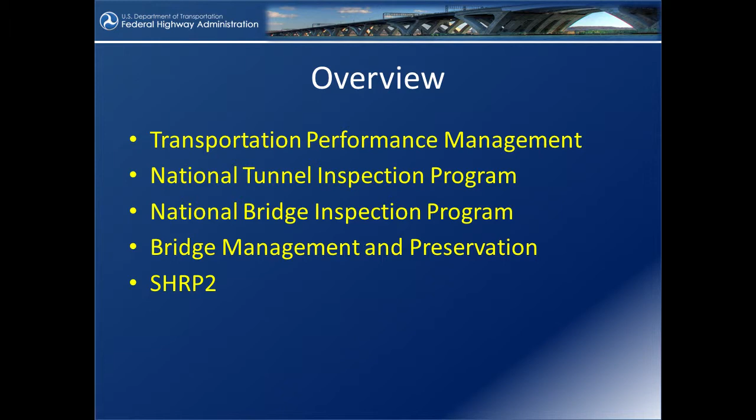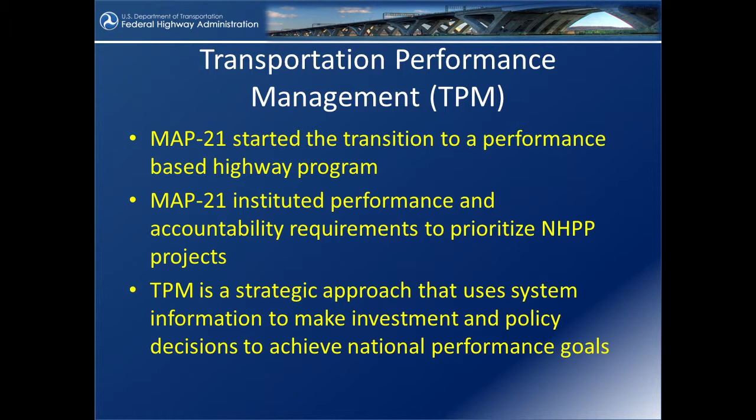Okay, MAP 21 started the transition to a performance-based highway program, was it 2 years ago, 3 years ago? We instituted performance measures and accountability requirements in the NHPP, which basically is for the NHS. TPM is a strategic approach that uses system information to make investment policy and decisions and national performance goals, and you can all read the slides. But basically, it's a way to measure how well we're doing. It not only helps us, I think, make decisions, but it helps us communicate with the public so that the public can understand what we're doing and how well we're doing it.

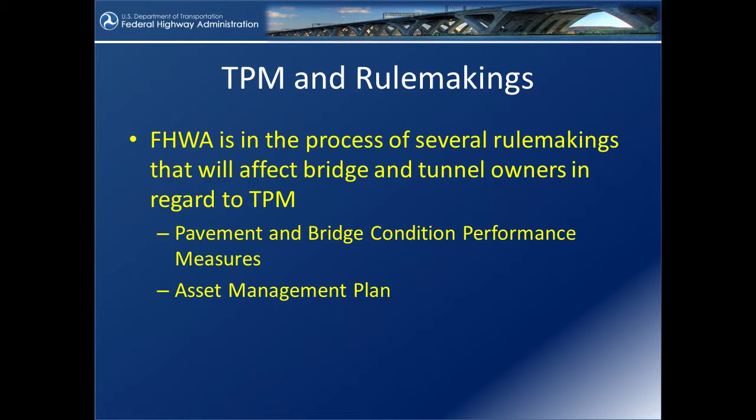There are rule makings that go along with this. We're in the process of putting together several rule makings right now that will affect bridge and tunnel owners: pavement and bridge condition performance measures, and an asset management plan. Pavement and bridge condition performance measures, the notice of proposed rulemaking was issued January of this year, and comments were accepted through April 6th of this year. Proposed measures for the NHS bridges were for bridges in good and poor condition. Proposed reporting on targets, basically the reporting period is every 2 years, and minimum condition level for the NHS bridges is 10%. I believe that's 10% of the deck area. FHWA is currently reviewing comments and preparing the final rule.

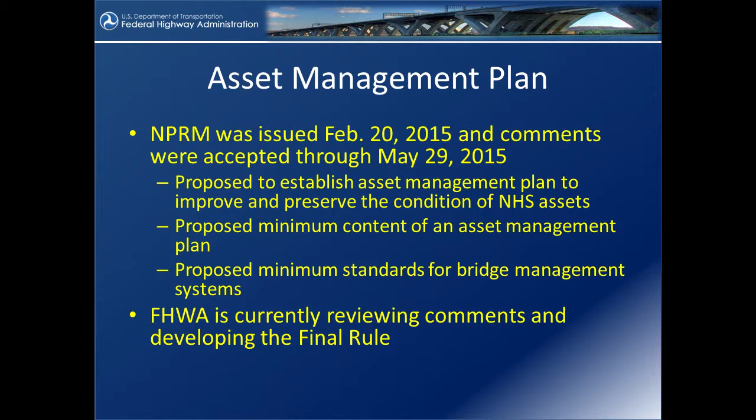The asset management plan, there was also a proposed rulemaking issued earlier this year in February. Comments were accepted through May. It was proposed to establish an asset management plan to improve and preserve the condition of the NHS assets, proposed minimum content of an asset management plan, and proposed minimum standards for bridge management systems. So it really just kind of sets up a framework for the states to work with. And we're currently in the process also of developing the final rule there. The tunnel inspection program, that just went into effect.

We've established tunnel inspection standards, just like the bridge inspection standards, and a tunnel inventory. We have specifications for the National Tunnel Inventory, and like any good Fed program, we've got all sorts of nice acronyms. So the specifications for the National Tunnel Inventory is called the SNTI. And then we have the TOMIE. The TOMIE is the Tunnel Operations, Maintenance, Inspection, and Evaluation Manual, and it's kind of comparable to the BIRM for the bridge inspection side.

And then we're currently in the process of doing tunnel safety inspection training. The first one was held in California about 6 weeks ago. Like I said, a few of us here today attended the one in Lakewood, Colorado 2 weeks ago. There's one currently being conducted in Vancouver, Washington right now, and there will be, let's see, that's 4. I think there's 4 more, so we're doing 8 total.

We're providing funding for 2 people from each state, plus basically all of the FHWA bridge engineers to attend the training. And it's not a cheap undertaking. Not only are we covering the cost of the training itself, but the travel costs too.

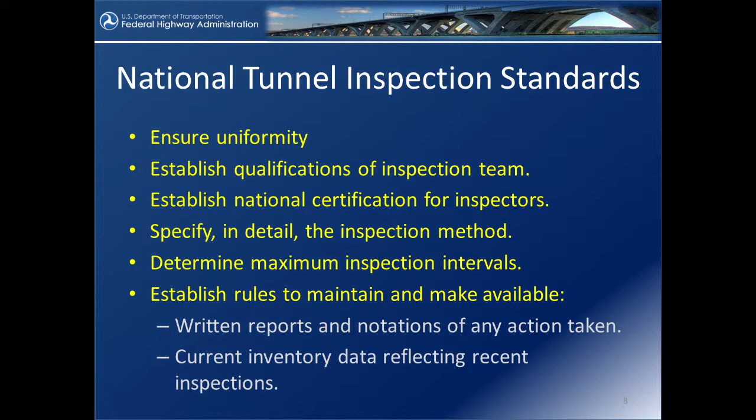We're specifying in detail the inspection method and determining the maximum inspection intervals, and establishing rules to maintain and make available written reports and notation of any action taken, current inventory reflecting recent inspections. We need to maintain good records for a lot of reasons, so that we know what we've done. We can go back and look at what condition our tunnels or bridges are in, and as you probably all know, more and more the public is asking for that information, so we have to be able to provide it.

The tunnel inventory is based on the specifications for the National Tunnel Inventory, the SNTI, and basically those specifications are all element level, just like the National Bridge elements. The structural elements are broken down into a lot smaller pieces, a little more detailed. The mechanical, electrical, and lighting tend to be at a little bit higher level and aren't broken down quite as fine.

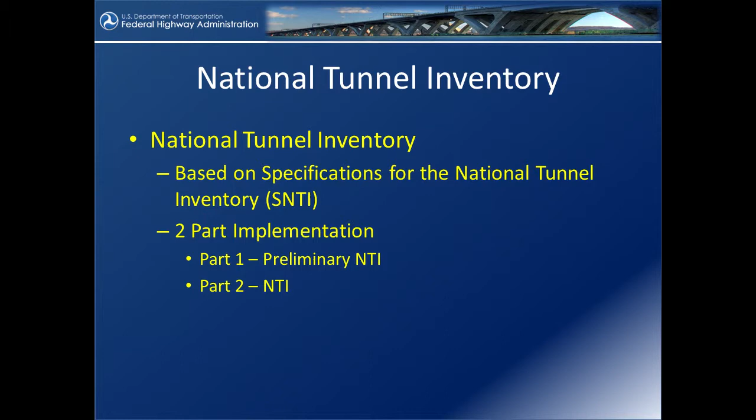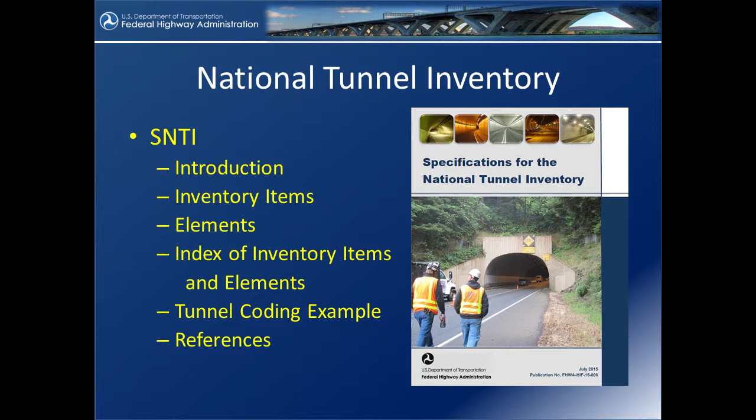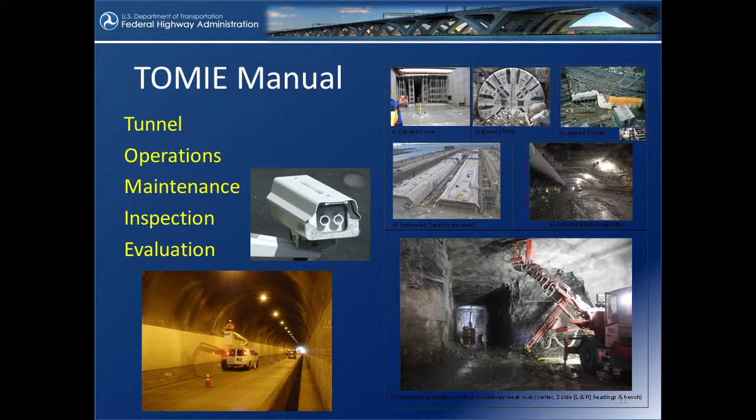And then it'll be a 2-part implementation. Part 1 is the preliminary tunnel inventory, and I think that's due in December of this year. And Part 2 will be the actual inspections. The first inspections are not due till, I think, April of 2017. The SNTI, the specifications for tunnel inventory, includes an introduction, inventory items, elements, index of inventory and elements, tunnel coding example, and references. The TOMIE is the operations, maintenance, and inspection evaluation manual.

The inspection course is NHI 130110. So if you want to take it and you're not one of the 2 people from your state that get to go for free, as soon as these 8 sessions are finished, NHI will start offering this. The inspection training was developed by Michael Baker and by HDR, I believe. And right now they're doing the training, and there will be some FHWA staff helping out with that. There are prerequisites for the training, just like there are for the bridge inspection course.

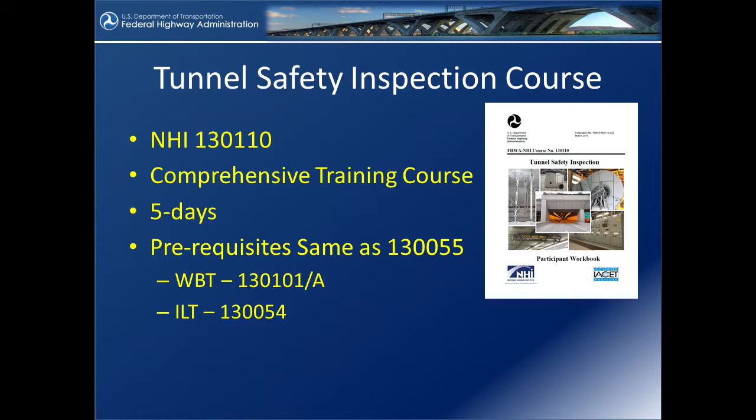The 130101A basically is for people that are experienced. It's just a test out. Take a test, you get 3 chances to pass it, and if you get 70%, you're good and you meet that prerequisite. Or you can take the instructor-led training 130054, which is Bridge Engineering Concepts. It's basically the first week of the 2-week course.

Like I mentioned, the first 8 sessions were provided by FHWA, 2 per state, 1 division office, headquarters, resource center, and federal lands. And we'll open up requests to teach the course in 2016. Here's the list of where the courses have been or are being taught. Sacramento in August, like I mentioned, Lakewood a couple of weeks ago, Vancouver this week. Nashville is coming up the middle of October, then Madison, Wisconsin in November, Boston, Atlanta, and Arlington.

How many people have already attended it? When is Missouri going? Do you know? We're going to Madison. You're going, okay. So nobody else would have, because all the other classes have been further west.

The implementation time frame. In 2015, we got the Office of Management and Budget clearance. And in July, the tunnel standards were published, along with the TOMIE, the SNTI, the NHI coursework, et cetera. And it went into effect August 13th. And we began the training. December 11th is when the initial inventory submittals are due.

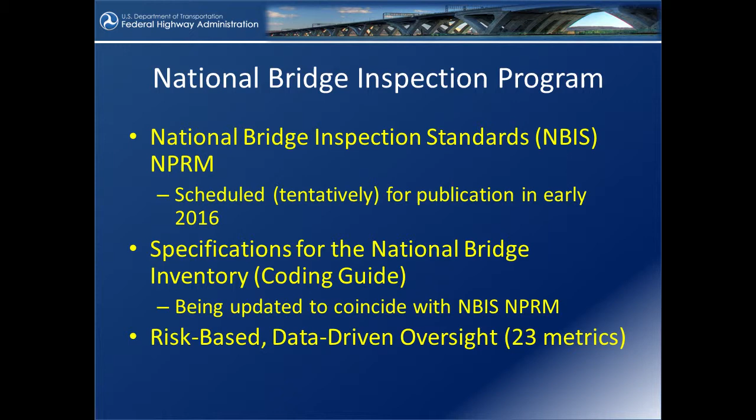We're still going to continue our risk-based, data-driven oversight, which people like to call the 23 metrics. Just kind of an aside here, something that I run into all the time. So many people still have a misunderstanding of these 23 metrics and think that it was some sort of new requirement that was passed. But basically these 23 metrics are nothing more than performance measures, just measuring your performance against the NBIS. And there's still a lot of confusion I've seen out there about that.

The 23 metrics, what things look like. We implemented them and used them for the first time for real in 2011. Again, we got caught up a little bit in some of the federal bureaucracy. In 2011, we did our review based on calendar year, and we have to work with about 3 or 4 different years in the Federal Highway Administration. We have calendar year, fiscal year, and performance year. So after the 2011 review, we switched to performance year, which starts in June.

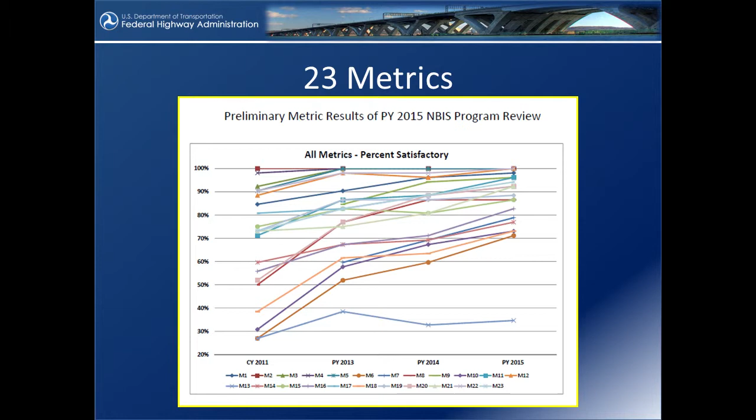So after that, there's kind of a difference here. So you can see how things went: metrics that were conditionally compliant year by year, and how that number has dropped in the 4 years. We started out with 338, and we're down to 145 after the review this year. This is kind of a busy slide, but it gives you an idea of all the different metrics. And then this is a similar slide presented in a different way that might be a little more readable on the screen, I think.

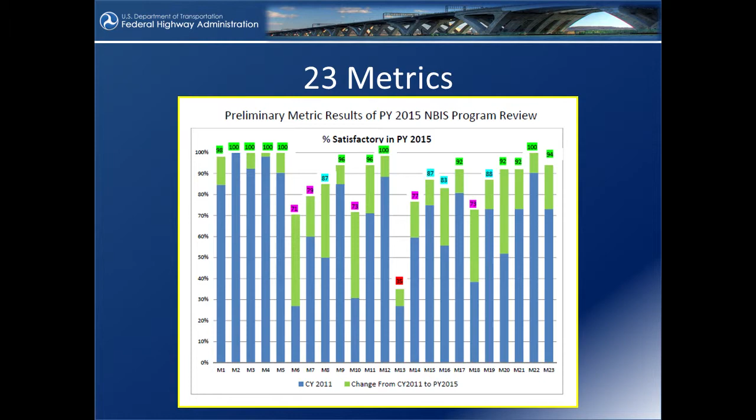And you can see at the top, it gives you the number that were satisfactory. That means they were either in full compliance or conditional compliance. And obviously the ones that have the shorter bar are the ones we're most worried about, Metric 13, which is load rating, being on top of that list. Also, we're still having some issues with frequency, and as a former state DOT guy, I understand that and the difficulty with that, but it's just something that we have to deal with.

Bridge management and preservation. We're developing several new NHI courses on preservation. Some will be web-based courses and are available now. And then for bridge management, there are also some web-based courses that are available now. And we're developing some bridge maintenance training and a reference guide. I know I'm going through these pretty quick, but if you want more specific information, I'll be here all week, just see me and I can give you these numbers and websites and things.

SHRP 2, Service Life Design for Bridges, R19A. The goal of that project was to provide longer service life by design through durable, state-of-the-art materials, construction techniques, and utilization of emerging technologies. That's one that we're working on right now. We have 5 states that are lead adopters: Pennsylvania, Oregon, Hawaii, Iowa, and Virginia. And there's the website to give you more information about R19.